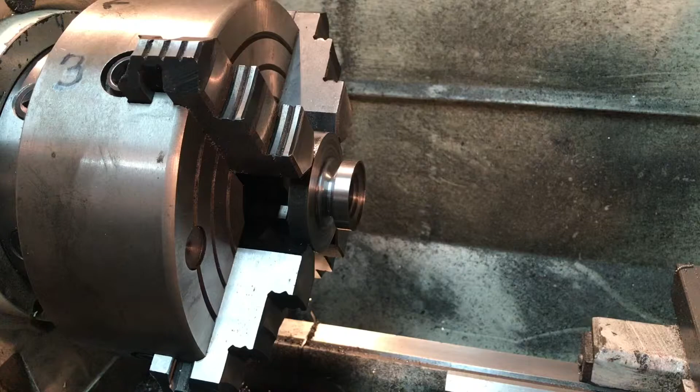Got a quick update for you, and if you follow my Instagram page, hopefully you saw the still photos that I published of this, but I've been working on the universal pillar tool drill head, and I'm really pleased with the progress I made on the spindle pulley. It was quite a lot of work.

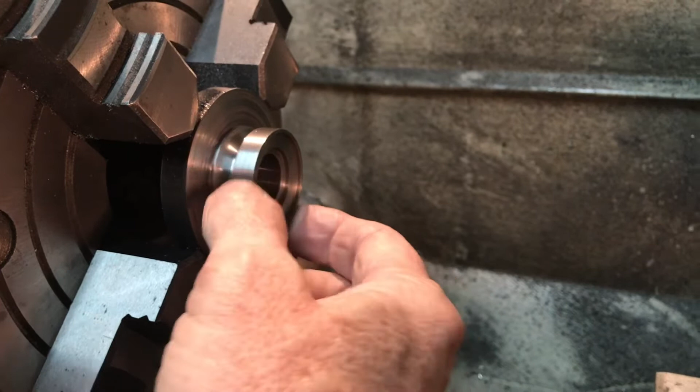This is just a chunk of 2.5-inch steel that I got surplus, maybe from Russ, maybe if it was you, thank you very much. It's really come in handy. But first I had to turn that down to 1.5 inch diameter here, and then I bored it out for just a press fit on the bushing that will go around the upper small spindle.

And I had to bore out a little space here for the head of that spindle and bore another space for the driving plate. So it was a good bit of boring operations with this carbide tip boring cutter is what I used. And when I got that done, then I cut the groove for the V-belt, and that was very, very interesting.

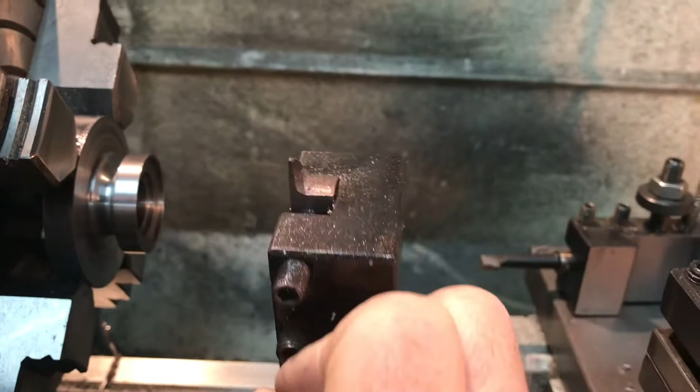First I marked it out, and I used this cutoff tool that I have. You've probably seen me use that before. It's a giant chunk of tool steel that I've ground down to a very thin space. I used that to rough it out, and then I used a piece of 1/4-inch tool steel that I ground as a form tool, and as you can see here, I did it in 2 halves, so that's coming out good.

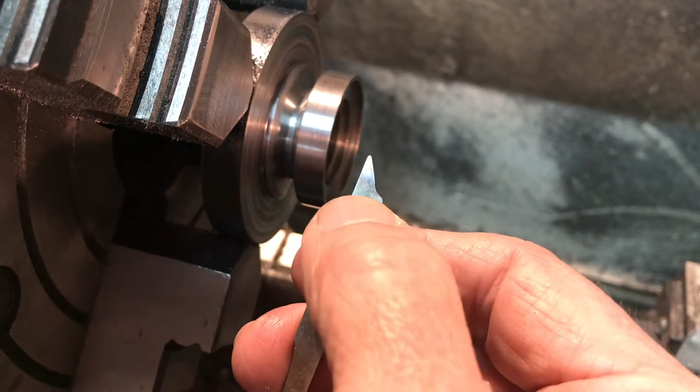Once it was roughed out, I just used this form tool first. What it is, 1/4-inch tool steel. I just marked out, you might be able to see some of the blue and the scratching marks here, but the depth is 240 thousandths. The width at the point is something like 40 thousandths, and the entire width of the cutter was 140 thousandths. So I ground that and ground the little angle on this one, and that's what I used to cut the right side, if you will.

And notice here I used the opposite end of the same piece of tool steel to create a form tool for the left side. And it was real tricky. As you can see, I had to relieve a little bit extra of it in order to be able to fit in here with the four-jaw. I should have chucked this out a little bit further, but I didn't. So anyway, it worked out great.

Hopefully I'll be able to shoot a little video for you of the cutting, because the next thing I need to do is turn this around, turn this part down to a 2-inch diameter, and then cut a V-groove in it. So I'm going to try to take a little video of that for the next segment and show you how the form tools work, because it cuts off a really neat looking chip. It's a really smooth kind of ribbon like chip, and very happy with that.

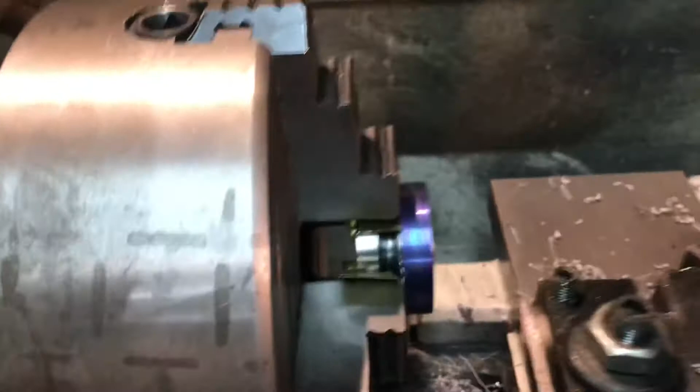Hey everybody, for this next segment in the Metal Mill 52 workshop and making the spindle pulley, as you can see, I've got it reversed in the four-jaw chuck. I very carefully centered it, both the outside diameter and also to make sure that it was running true here. I've got brass on all 4 of the jaws, and I actually used some old business cards of mine to do the offset here.

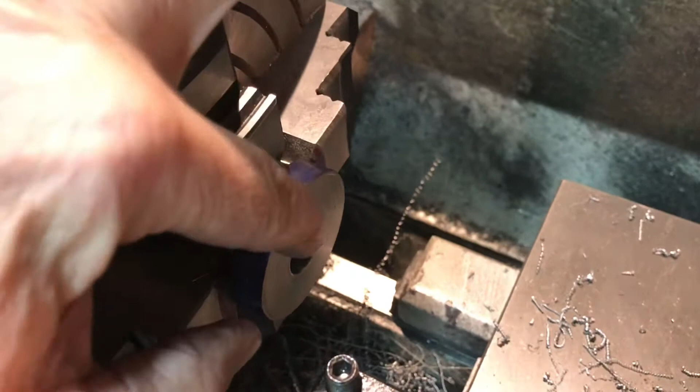So there's about, you can't see it, a 5 thou gap in between the rim of the pulley and the jaws themselves, so that made it easier for me to turn it down. It was 2.5 inches in diameter, now it's down to 2, and I've marked it, and you might be able to see a little faint line there. I've scribed where the center line of the pulley is, just to give me a rough alignment as I get closer to actually machining this.

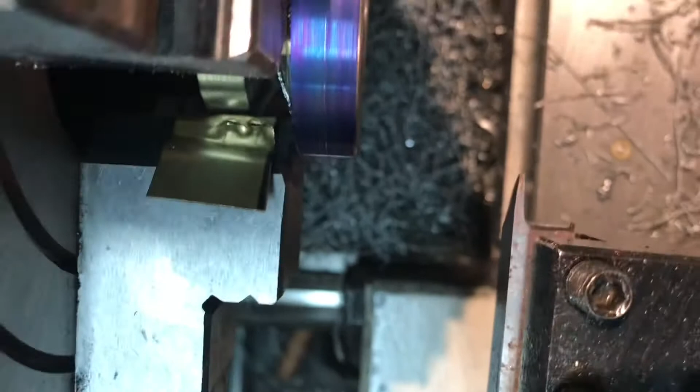Let's see if I can tip this over and show you the cutter. There's the cutoff tool right here, I've got it in place. I've got it aligned and locked down, and I also measured to get the center of this. So let me show you, pull over here, I'm gonna push the tool in a little bit. Where are we at there?

There we go. Alright, I'm gonna crank the tool in just so it makes contact with the work, and I'll mark my 0 for my X. Not hard, but just touching. So let's mark the 0 here. And then coming back down, I'll back it out so it doesn't interfere with the work.

Now, as you can see, I'm moving it down, and the center of the V-groove is supposed to be 0.203125. They gave the thing in fractions, so 0.203-ish is the center. And what I'm trying to do, as you might be able to tell, I'm moving it back and forth, and I'm trying to get on my DRO the 0.2032, and let's see, we just tip it. See, it's really sensitive. There we go. Okay, that's probably as close as I'm going to get.

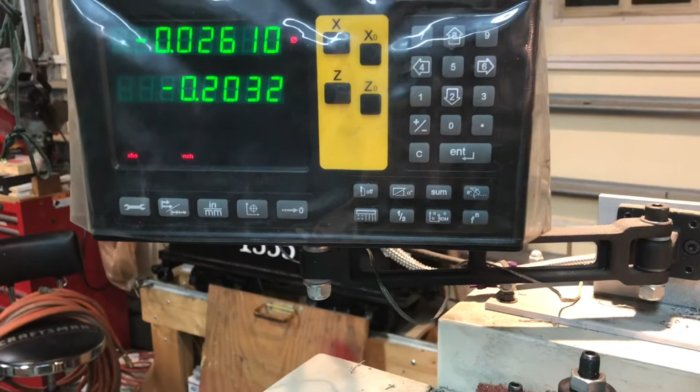So I'm going to use that for my center line, and I'm just going to go in. I'll just basically plunge cut for a while. I'll be able to go in and plunge cut to the 250 thou depth, and eventually go all the way to 480 thousandths is how deep it is.

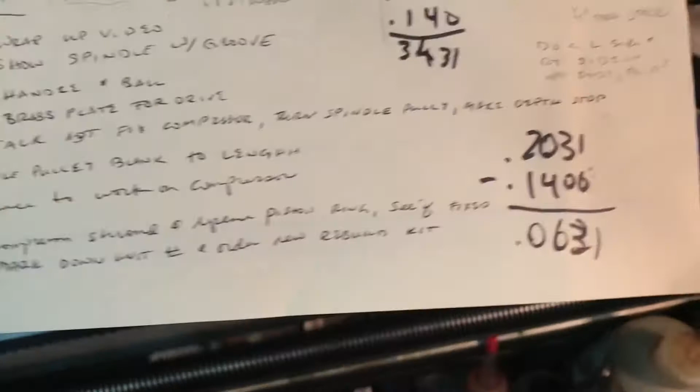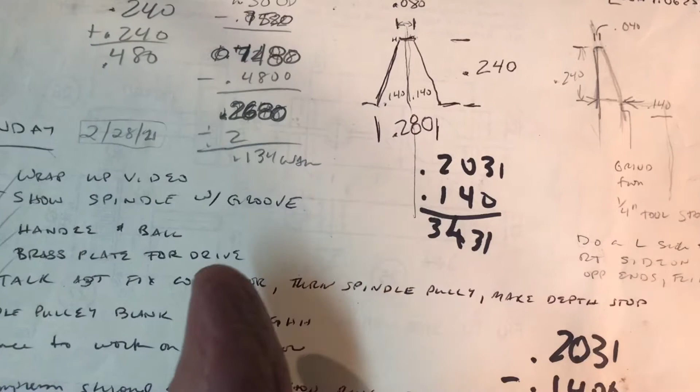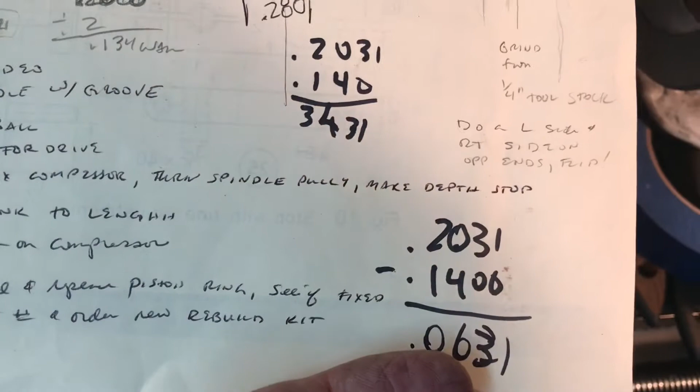And what I'll do next, I'll move my cutter over the furthest from the surface. The furthest it's going to go is 0.3431 over towards the left when I move it, and when I move it out, closest to the bottom edge, it's about a 1/16 of an inch gap there. So I hope that makes sense. I do the math on how far the cutter's got to move.

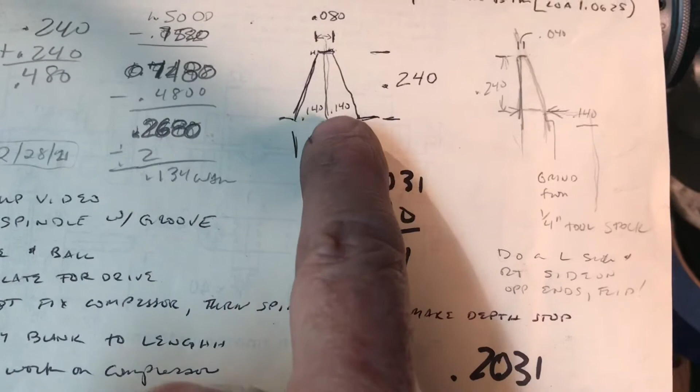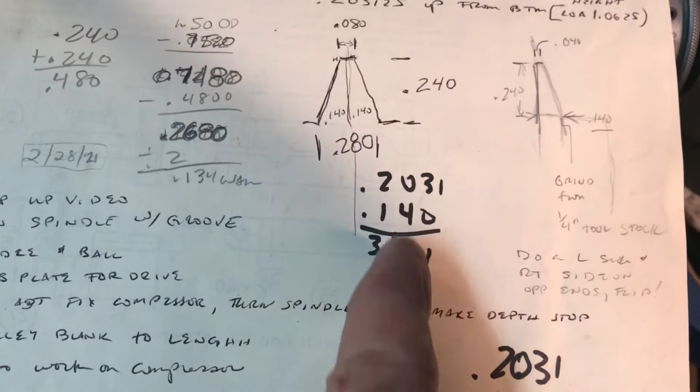I actually need to adjust these for the width of the cutter, because I've got the cutter set right there, right on the center, and it's actually the cutter's 18 thousandths. So if I was to move it over all that way, it would cut too far. So I'll have to take these numbers and remove 18 thousandths from them. So that's half of the width of the cutter at the tip for the parting tool.

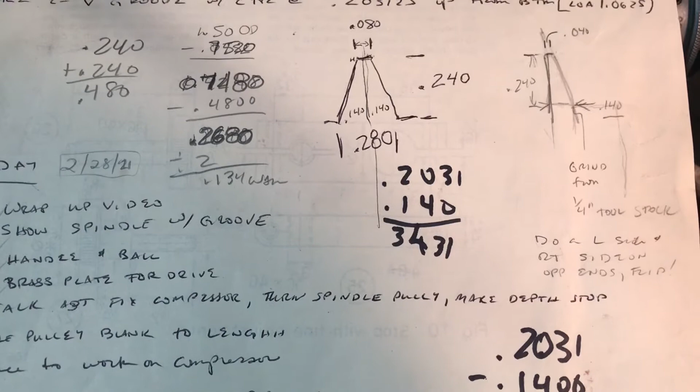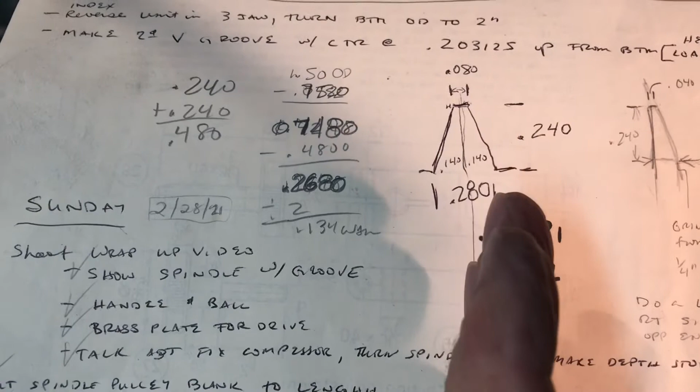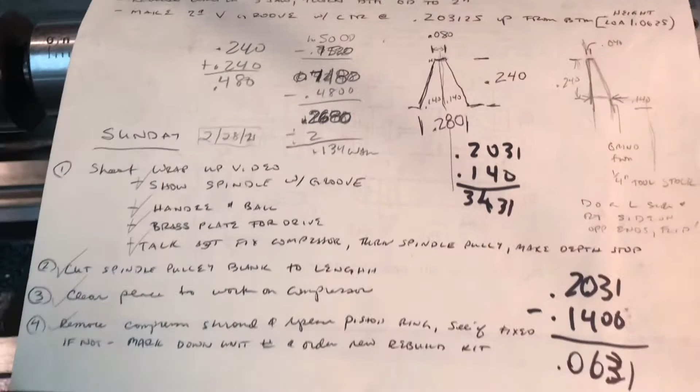And so I'll be able to lay out the basic cut, and then I'll just by eye from the edges to the center cut a V groove, and then I'll replace it with the actual form tool that I showed earlier, and I'll cut that. So hopefully I'll get some live action of that, and that'll make some sense to you. So stand by for the next segment.

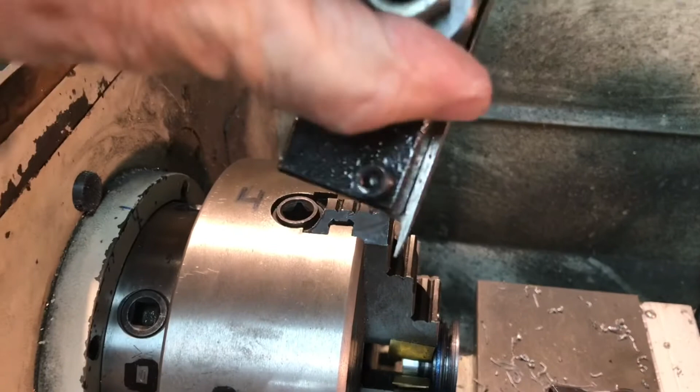Thanks. Hey folks, next little segment here. That did not take long at all. I shot the second segment maybe 10 minutes ago, something like that, maybe even less, where I was describing the cutoff tool. As you can see, I did offset it a little bit, so it's sticking out again for clearance for the jaws there.

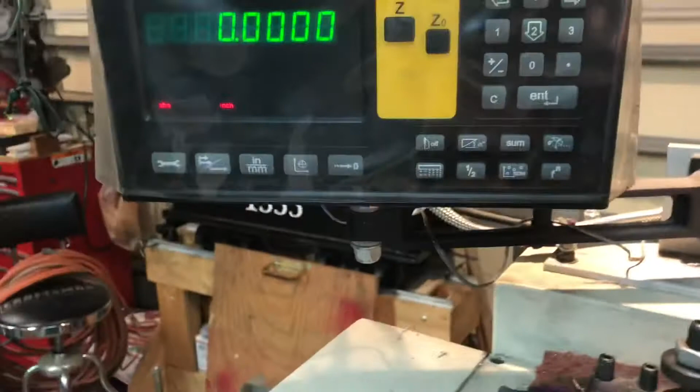And now I'll show you the form tool for the right side of the pulley groove is in position. Get some light on, there we go. And what I've done, I've just touched it off on the Z-axis here, so the inside of it is touching the base of the pulley. So now I zeroed the Z here, so I can move it over to the center line, the 0.203. I'll do that in a second.

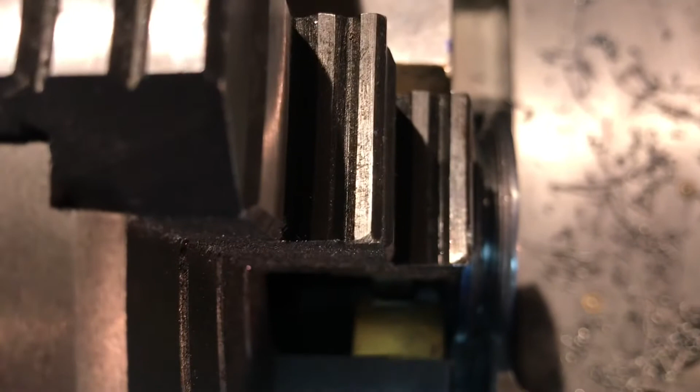Another thing I need to do, sorry for the erratic camera work here, but I need to touch this. I'm going to go into the center if I have enough room. Where are we at here? Man, I don't know if I can show this or not, but I do need to touch the diameter.

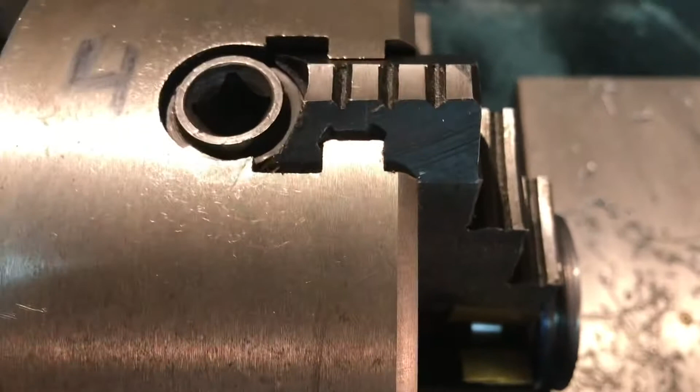Hey everybody, welcome to the next segment of the Metal Mill 52, making the spindle pulley. As you can see, just a few minutes ago, actually in real time, I used the cutoff tool to make this kind of a yo-yo shaped groove inside the center of the pulley, removing a lot of material that needs to be removed, so that the form tool doesn't have to work so hard. And that's another point of making the form tool in halves, so there's clearance on both sides for the cutting, and it just makes it simpler that way.

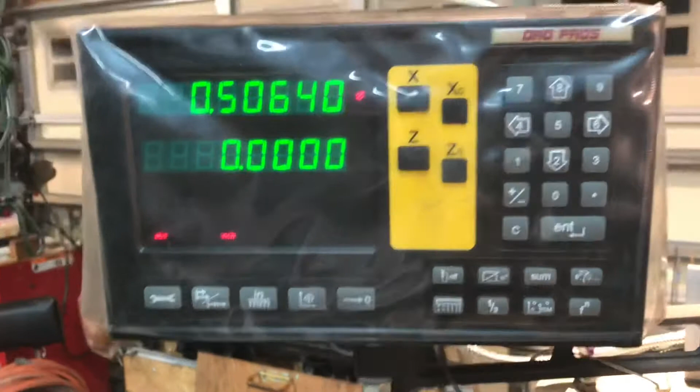So right now what I'm doing, I'm touching off the tool onto the base of the spindle pulley, and I'm going to set my zero there. Alright, and so now I can just move it to the 0.023 to the center. The other thing I need to do, I don't know if you can see that or not, but I just touched the tool to the rim of the material, the unmachined rim, so I'm going to set the X0 so I know how deep to go.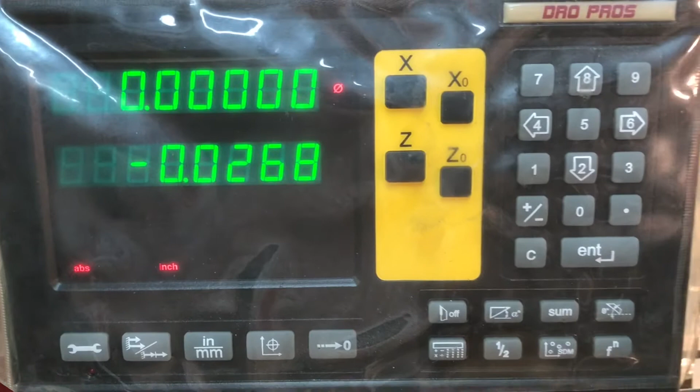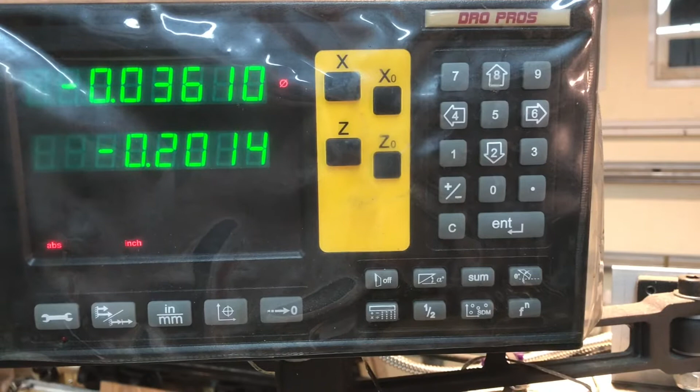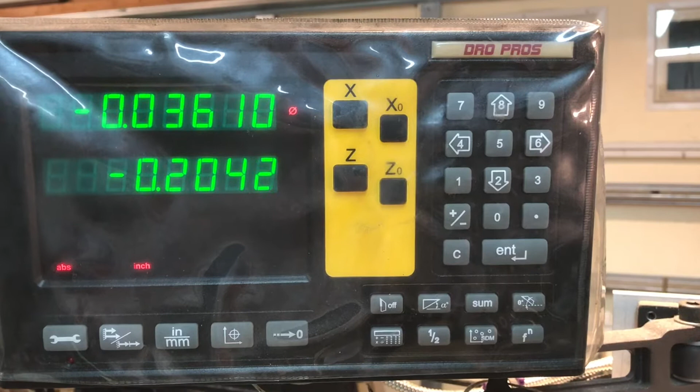And because my DRO is set up for diameters, I could change it, but I don't want to, the depth of cut is 240 thousandths. You have to double that though, because the reading comes in halves. So a few minutes ago, when I said the cut is 480 thou deep, what I meant was the readout is 480. And see, I'm trying to, there we go, trying to tickle it to get the Z to the center line. And I have machined using the cutoff tool down to 240 thou, or 480 on the readout.

Sorry, there's not better light there. Anyway, so that's the setup, and let's see. I don't know if this is going to work or not, but I'm going to try to turn this on and just give you a little flavor for how the form tool itself cuts. So hang on a second here. Alright, and you'll see also that I have it set on a very slow speed. 70 RPM is the cutting speed.

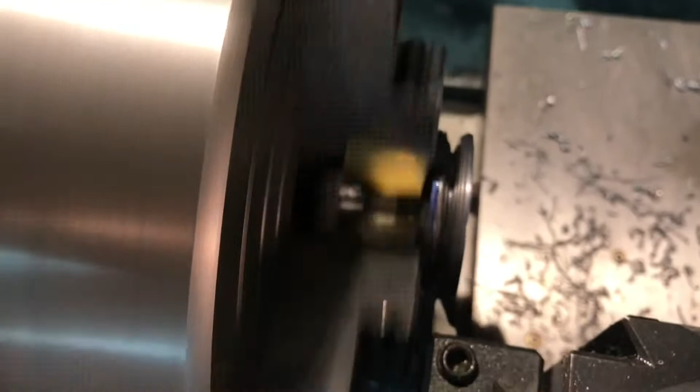If I had a third hand, I'd hold a flashlight so you could see the actual cut. But from where I'm standing, I can see it, probably way better than it's showing up on the video. But if all goes well, you'll see some ribbon-like pieces of steel coming off as the form tool, right, I'm turning it in on the x-axis, traveling in.

It really is, to me, one of the artistic kind of things. That's why I'm not going to video the whole thing, but you have to kind of use both hands and ease into it. Right now my depth of cut is about 150 thou deep. It's showing up 300 on the digital readout.

278. Now you might be able to start to see some little slivers of steel coming off. Try to get a little better angle here. It's very slight, ribbon-like. I don't know what kind of steel this is, but it really cuts nice. It cuts like 12L14. I don't think it is, but it could be. But really happy with it. It's lovely to work. Hopefully you can see those ribbons coming off.

It's really, really nice. I got about 30 thousandths more of depth of cut, and I'm just easing off those uneven cuts that were made by the other tool. So that's it. That's 480 thou it's reading and still on my original center line. Let me go ahead and back the tool out and cut the lathe off.

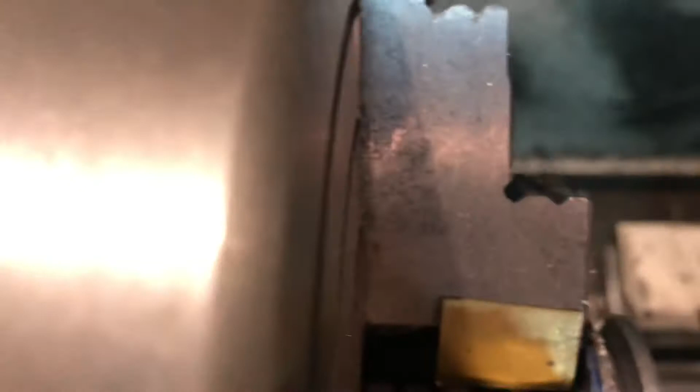Hopefully you can see it now. So that is pretty nice. What I'm going to do, I'll machine both of them, and I'm going to move it around by hand a little bit as I cut it. But just compare one side to the other. You can see how clean the right side is, and how nicely the form tool evens that all out. So I will widen it out just a wee bit with my hand.

These cutters are, if anything, either right on or a teeny bit undersized. So it gives you the flexibility. You can move, because it's so small. I can move it to the right and clean that up, just get rid of any little lines that are left there. So I'm going to do that before I remove the tool, and then I'll flip this thing around, flip the tool end for end, and use the other side cutter to cut the left side. But you get the idea.

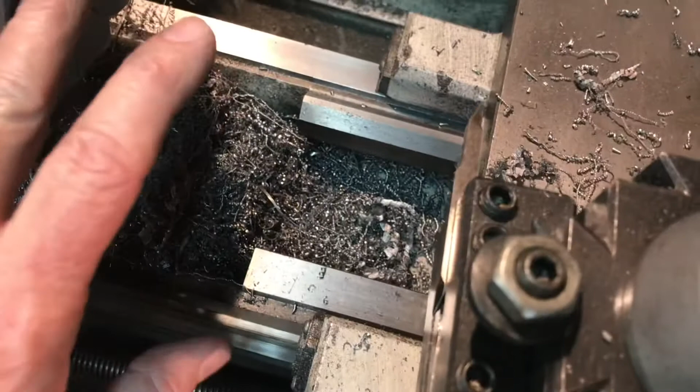In the last segment, as you can see, I've worked on this spindle pulley a little bit. I widened out the groove in the bottom. It has to be 80 thousandths of an inch wide, and I worked on it with some files, just trying to take off a few of the rough edges. And it is a challenge. As you can see, I've got this tool stuck way out there. If I had it stuck less far out of the chuck, or perhaps had used a 3-jaw, then it would have probably been a lot easier, but I wouldn't have been satisfied with the centering of it. So a little trade-off there, but I am pleased with how the pulley looks overall.

So the next thing to do is just take it out, clean it up. I need to press the bearing into it in the center, and then I will be cutting the drive plate, and I'll probably mark that out tonight before I go in. Cut the drive plate and machine it to 1 3/8 so it fits in the hole in the top of the spindle pulley, and then making a little drive slug. So lots of little things left to go here. It's late on a Saturday night, but it's been fun out here, and really pleased with how the pulley's come out.